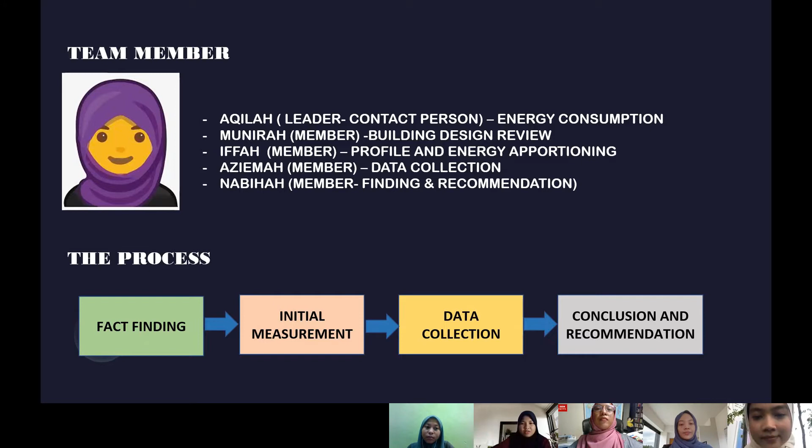The building description for our report: we decided to choose one of our team member's houses, which is Aqilah Syuhada's, as the investigation place. Aqilah's house is at Kulim, Kedah, with 3 people including Akila in her household. The area of Akila's house is 100 square meters, so we assume lower energy consumption is used in her household. That's all from me.

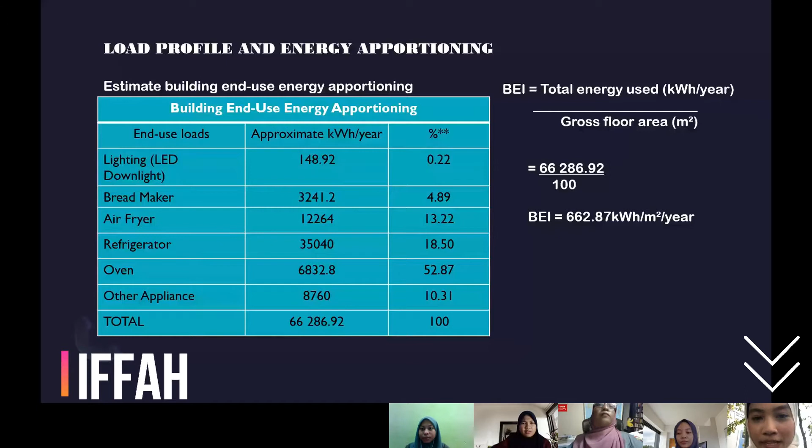I will continue the presentation to the next presenter, Iffah. I'm going to present about building energy use apportioning. As you can see, we use various types of appliances in Akila Syuhada's house, such as lighting, bread maker, air fryer, refrigerator, oven, and other appliances found in her house. We use the formula for building energy use apportioning, which is total energy use divided by the gross floor area.

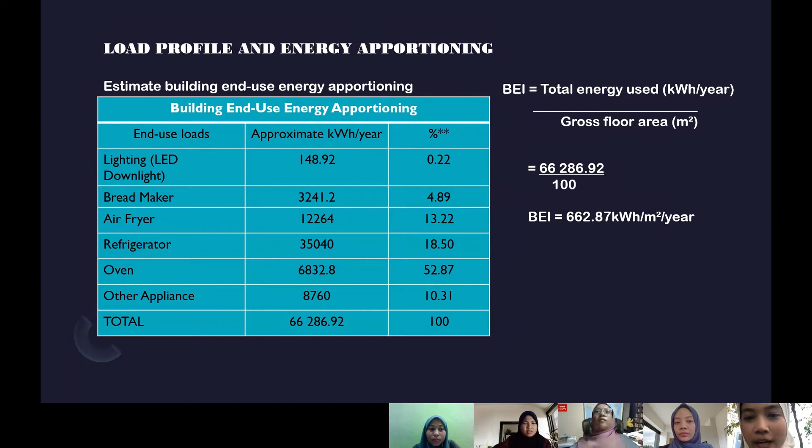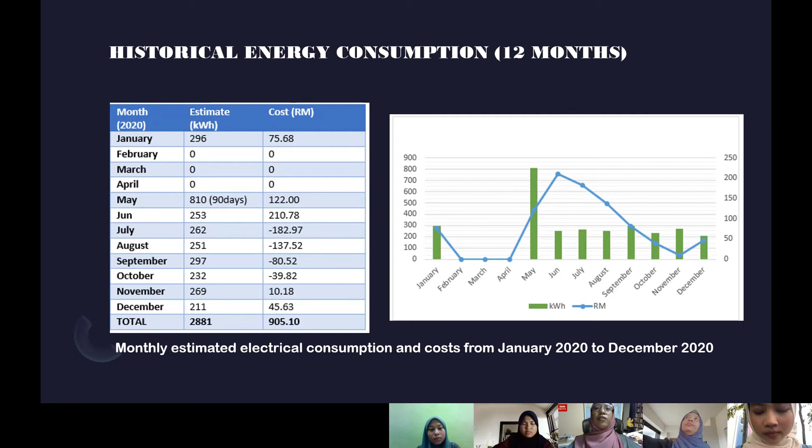The exact price that my parents had to pay is 464.27 ringgit. This is because TNB had an initiative during the COVID-19 pandemic, which is the Bantuan Prihatin Elektrik Tambahan. From the bill statement in May, which covered the amount of kilowatt-hours over 90 days, when the average was calculated, the average was 240 kilowatt-hours.

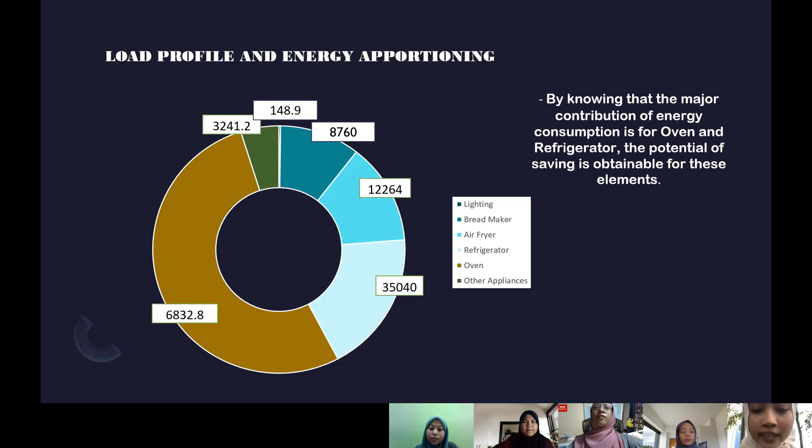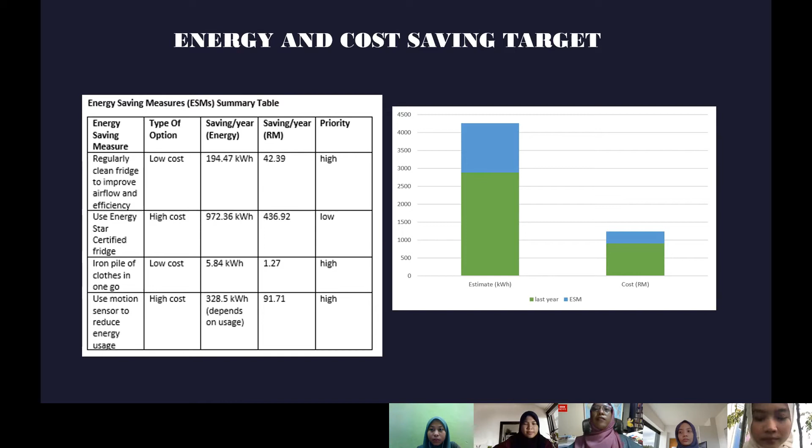Thank you, Akila. I'm Nur Aziemah. In this part, I will explain the data collection. We chose a survey as our data collection method, and in this survey we identified the household item that consumes the most electricity. As you can see, the item that consumes the most electricity in Akila's house is the oven.

The oven is at the rate of 52.87%, and the second major contributor is the refrigerator, with total consumption at 18.50%. The third major contributor, at 13.22%, is the air fryer, and the rest are other appliances: the bread maker at a rate of 4.89%, other appliances like iron and washing machine at 10.31%, and lighting like LED downlights at 0.22%.

Next, we continue with Nabihah, the next presenter. Assalamualaikum, I'm Nur Nabihah and I will continue the presentation with the finding and recommendation part.

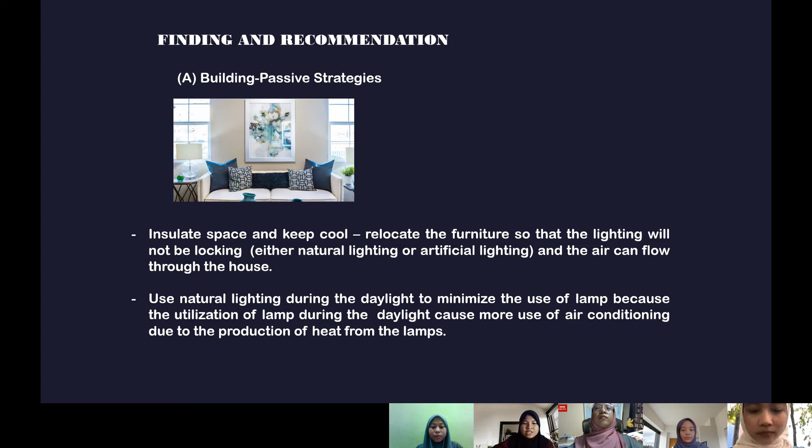For the next strategy, we set a time setting for air conditioning units and actively clean or replace all filters in the home regularly, and use a smart thermostat, as setting it efficiently is a good way to save energy and reduce the cost of electricity.

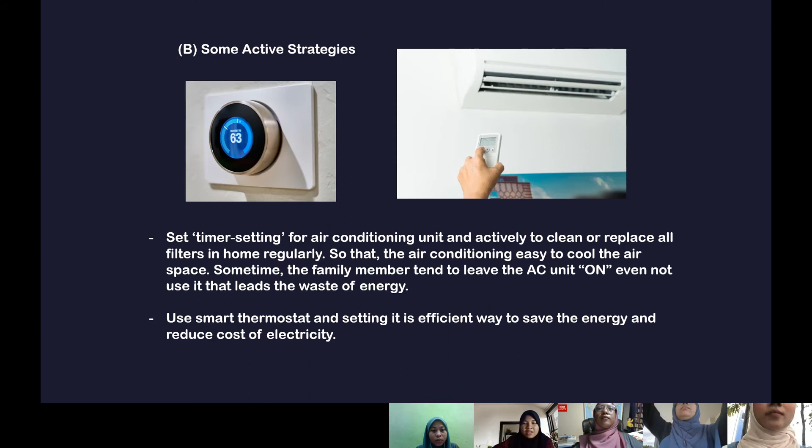Checking or maintaining the light fitting and replacing the faulty part to ensure sufficient lux at home. The saving can be achieved by using motion sensor lighting inside and outside the house.

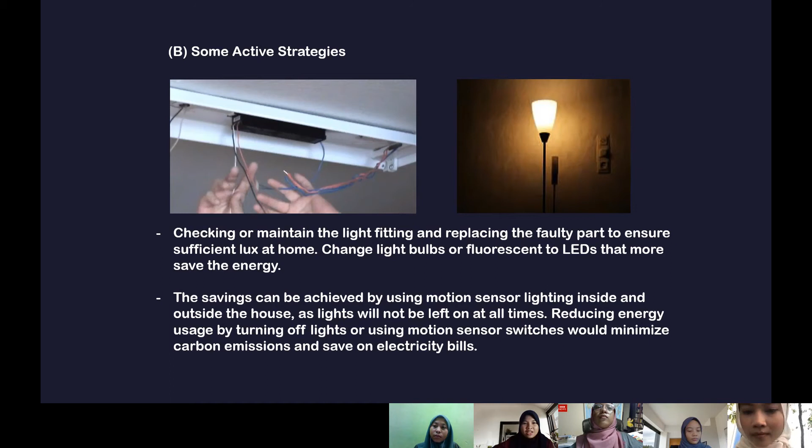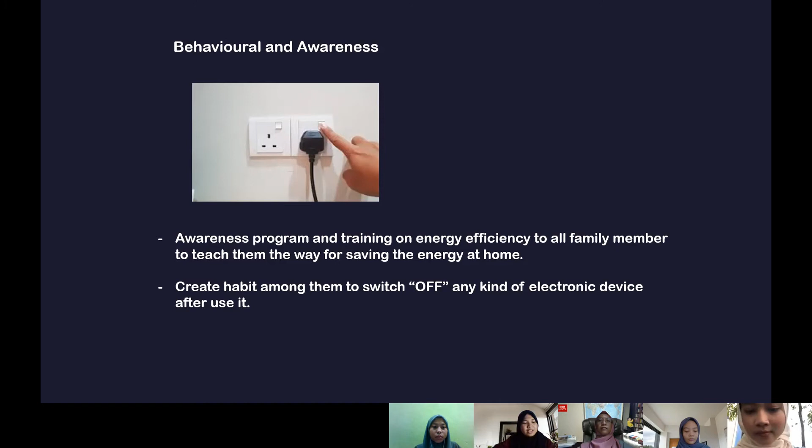Behavior and awareness: we create habit among them to switch off any kind of electronic device after using. All this low cost action is estimated to reduce the energy usage.

In this house building, it has one energy meter that been installed by TNB, Tenaga Nasional Berhad, to measure the energy usage by the user that will come out with the bill at the end of every month.

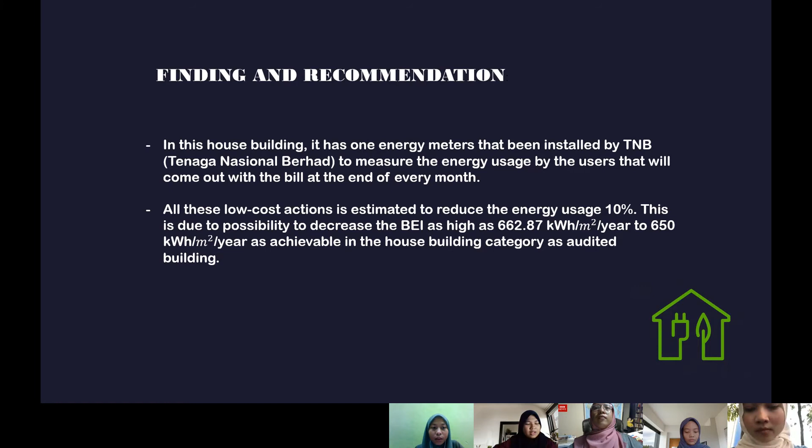Finding and recommendation for the general approaches. First, motion sensor control for staircase less-occupied areas. Second, introduce remote passive daylight to areas which cannot be reached by natural daylight through normal fenestrations. Third, reduce heat gain from above ceiling space by using turbine ventilator to minimize heat conduction through ceiling panel.

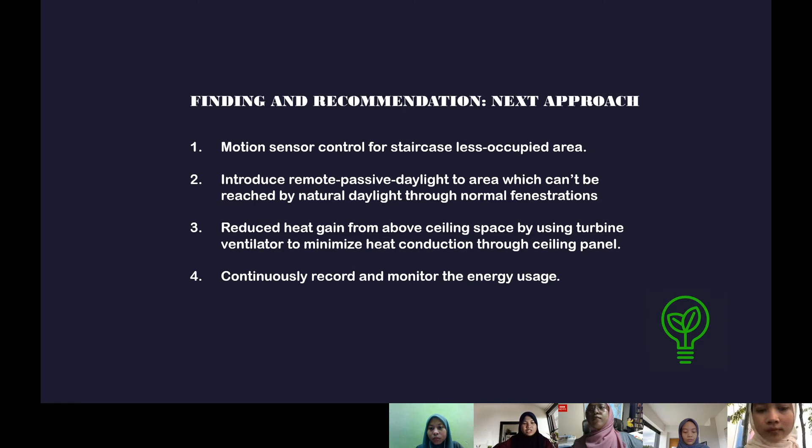And fourth, continuously record and monitor the energy usage. I will continue with the next presenter.

Okay, thank you, Biha. Continuing with me again. In this finding and recommendation for the next approach, we choose oven as our next approach to identify the cost and how we want to save the electricity using oven appliances.

Since oven contributed 50.87% of energy used in this building, the way to save energy is by using an oven that consists of a 5-star energy rating. This is because it will make the oven more energy efficient. Therefore, the more stars, the more energy efficient, plus the less you pay on your electricity bill.

Below, we show the calculation of the wattage of oven in Aquila House. The number of ovens installed in Aquila House consists of 2 ovens. Each installed oven contributes an estimate of 2,500 watt plus 1,500 watt, so the estimate is 4,000 watt installed. We multiply by 2 ovens, so we got 8,000 watt of total existing oven in Aquila House.

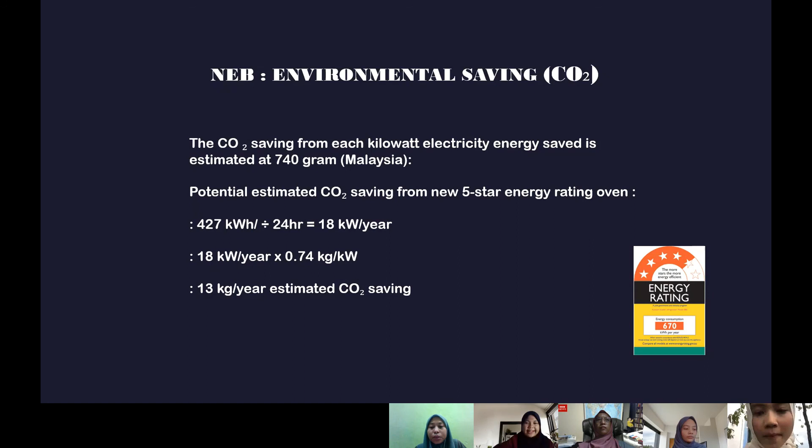For the next approach, we consider the second major contributor to energy consumption in Aquila House, which is the refrigerator. Since refrigerator contributed 18.50% of energy used in this building, some engineering control is really helpful for any wastages of energy due to bad human habit, such as a door alarm.

With a door alarm, it can possibly help us save electricity even if you forget to shut your refrigerator door or leave the door open longer than 3 minutes. The beeping signal will sound and alert you, so you don't have to incur extra electricity cost, and there's no risk of food getting spoiled.

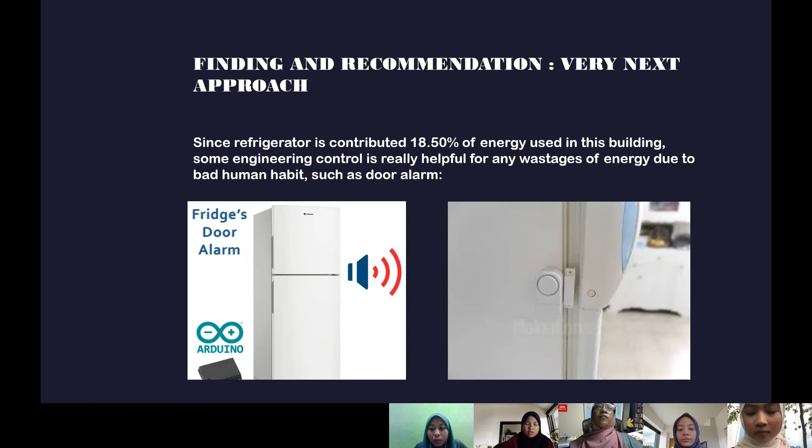Okay, thank you, so I will pass to the next presenter. I'm Nur Nabia and I will continue for the summary part.

There are two types of energy saving opportunity: low cost and medium cost. For low cost, we relocate the internal arrangement, utilize daylighting, change furniture, book lighting, regular maintenance and checking, and awareness activity. For medium cost, we apply motion sensor, light sensor and turbine ventilator, maintain regularly, and impose automatic timer to the individual air conditioning.